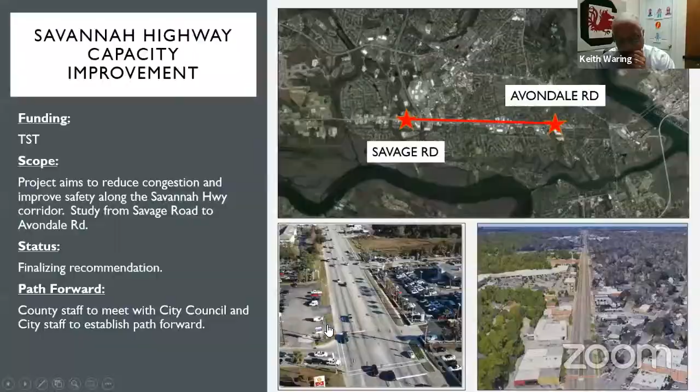Are we doing anything by design to make it easier for people on the West Ashley Bikeway to cross 17 to get to the Greenway? We have the crosswalks there, newly delineated with brick stamp crosswalks, and then just the 8-foot path is what we're proposing through there to connect the two. Okay, so they'll have a button they can push to control them? Absolutely, just as you do at pedestrian signals, those will be at each of these corners.

And I'm going to tell you all this. What I've shown you in those three are just conceptual plans. So there's going to be some opportunities for us to tweak these, and as we move forward we'll be working with city staff to help tweak these to what they need to be in the end. So all those comments, questions, those are great, and we'll make sure we address those as we move forward.

Well, thank you. Thank you for all y'all doing. This is great movement. Richard, that was a very thorough and comprehensive report. And for those listening in, you can see the amount of work we've been dedicating to the cooperation between the city and the county on all these projects.

Thank you, Richard. To follow up on Councilmember Waring's question, we did have some discussions about the other side, on the St. Andrews Boulevard side, of connecting the bikeway as you cross over. I think we've been paying attention to focusing on Sycamore Street and improving that particular intersection as well. Your question reminded me about that — we've been working on that project as well. So thanks for bringing that back up.

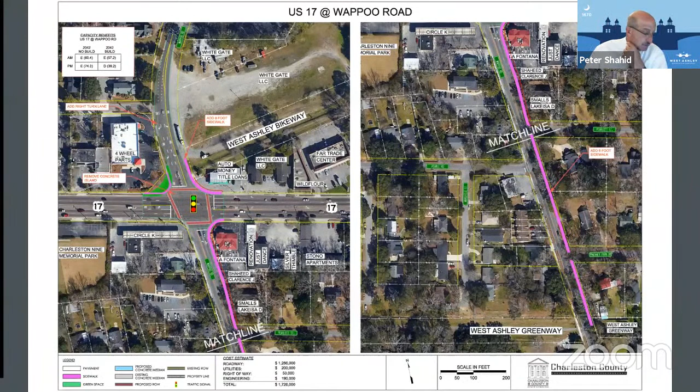Any other questions from the commissioners for Mr. Turner? Because we can move on to the Sumter Street redevelopment project next. Yes, Hamilton? What is the tentative timeline for these various projects, or have none been established?

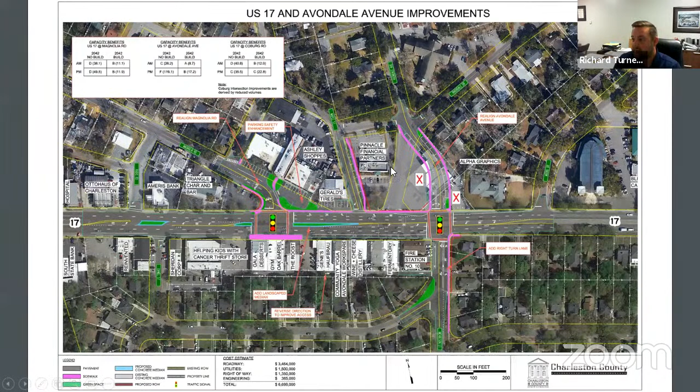For any particular one, these three, I'd say we're probably about 2 years away from breaking ground, maybe longer on the Avondale project, because of the significant right-of-way impacts and changes that would happen there at the old Krispy Kreme and the bank and things of that nature. That one will take a little bit longer to develop than this one.

Hopefully as we move forward we can have some good conversation with Mr. Palas on this property to move this one forward. Other than his property, we really don't have any right-of-way impacts, so this one could potentially move forward pretty quickly.

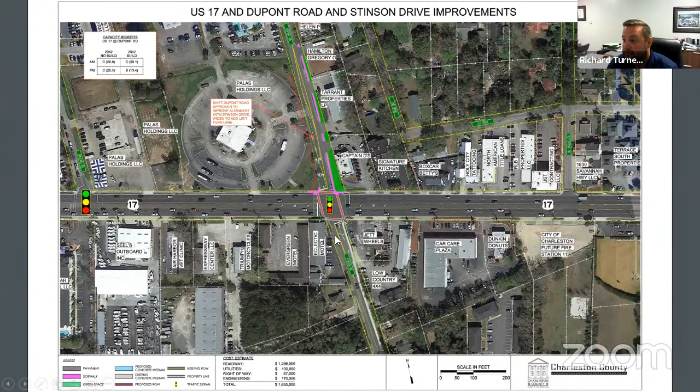Same thing here — we do have a bit of right-of-way, as shown by the red line, new right-of-way acquisition there at the La Fontana and the residence along Wappoo Road. So I'll have to have some conversations there to see how that moves forward.

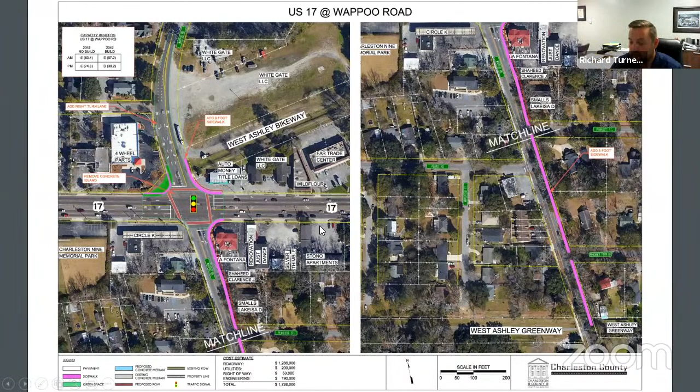The others — the Glenn McConnell project — is in our procurement office for advertisement as soon as possible. We've asked them to make that the number one priority, so we hope to have that advertised for construction bids by the end of this month.

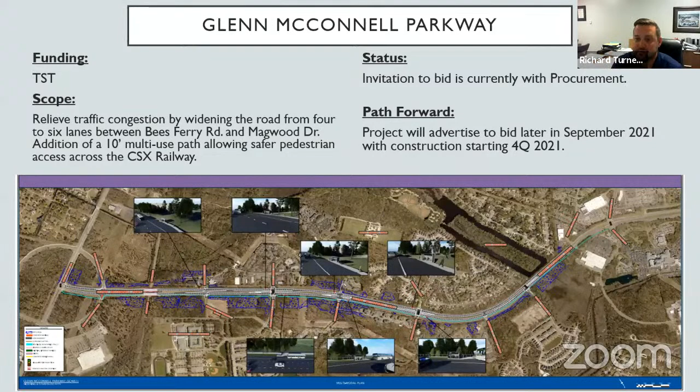The Old Town District, we are probably a year to 18 months away from bidding this project. And then the main road corridor — this one really depends on what delivery method we end up with, whether it's design-bid-build or design-build. If it's design-build, we could be advertising this in '22, my hope, but then it would probably take another year before we'd actually break ground. So we're probably 2 years from breaking ground on this one on the short end.

Okay, thank you very much. You're welcome, Ms. Hamilton. Any other questions from any commissioner members?

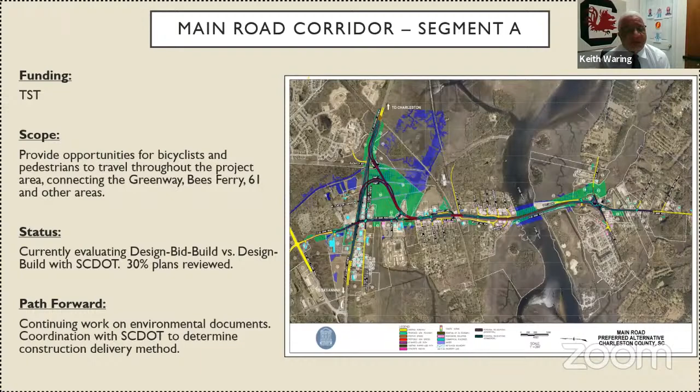Yeah, I hate to say it, but Mr. Turner made mention — and it was a veiled mention — but I think about the county having money to do a certain amount. I think maybe we were talking about Sumter Street. You said it was going to take about 10 million, and you had about 5 million in hand, with the city participating in that. Can we get a better explanation on that? Because it is, hopefully, the strength of this revitalization committee that takes that message forward. We're in the budget process now, as our chairman knows, and if the city can participate to help this come along a little bit sooner, we need to do so.

So if we get back to the money on this side, Mr. Turner, I thought this was the project you made mention about having some in hand and needing some help. That's correct. This year, county council voted to put $5 million into this project, and it's a $10 million price tag, so we're halfway there on completely funding all the improvements.

We have looked at the opportunity to phase it. The first phase would be the intersection here, redoing the intersection, and getting us to about this point. Then the second phase, depending upon which one moves forward first, would be the remaining impact, including Sumter Street, the Amberley Signal, and the realignment there of Donahue and Charlestown Drive.

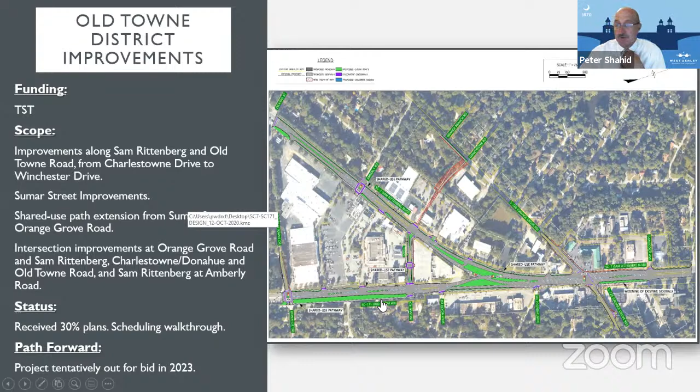And because it's going to have an impact on our redevelopment plans for Sumter Street, but also, as Mr. Turner pointed out, it's going to have an impact for access to that new county park that's being planned as well. So there's a lot of benefits moving forward with this project and funding as fully as possible.

One thing to share though is we're going to continue moving forward as if it was one large project. So we're going to continue developing the plans to 100% for the project as a whole. Where we'll need the money is on the construction side, the acquisition, the little bit of right of way that'll be necessary, and the design that's fully funded for the entire project, and we can move that forward.

So that's not going to slow down. It'll just be, we need to identify the other half of the funding to do the entire project as one construction project. All right, thank you so much.

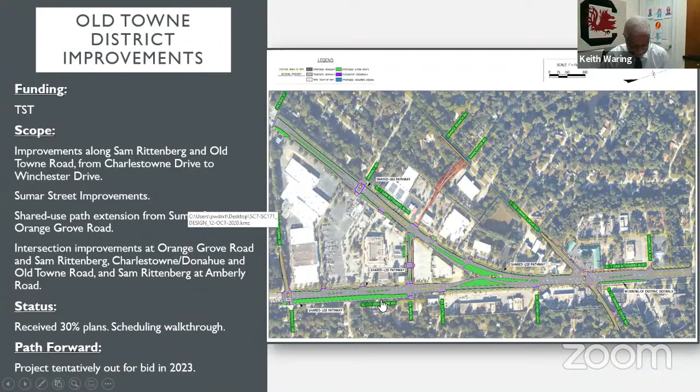All right, that being said, Eric, can we move on to item 3B?

Yes sir, I think I do see Julia Copeland available somewhere. I think she's either on her phone or, she was able to join us. And the mayor has signed on as well. So I know, yes he was sir, tied up in another meeting with that. So you want to start the ball rolling on this one, Mr. Eric? Yes I will, thank you. One moment, let me do a screen share again. All right, go.

So it goes all the way back to 2017 when the city purchased out the parcel. After that, we adopted Plan West Ashley. Then in 2018, we moved through a demolition. We had to get a contract bid out, had to do all that good stuff. Starting February 20th of 2018, we actually placed a notice for demolition services.

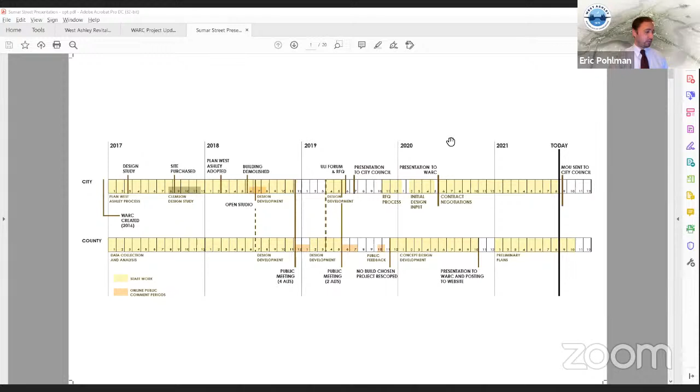We then had a presentation to council to show what we had been working on up to that point, before we did a release for request for qualifications. After that, we had Landmark Enterprises, who'll be able to talk a little later in this presentation. They came on board, and we worked through with them some background on what we wanted to see happen at this location.

And then we entered into contract negotiation after June of last year. So to go back in time now on the presentation, we had a very robust public input process for about a solid 30 days in 2018. It's a good month there. We had a survey up online.

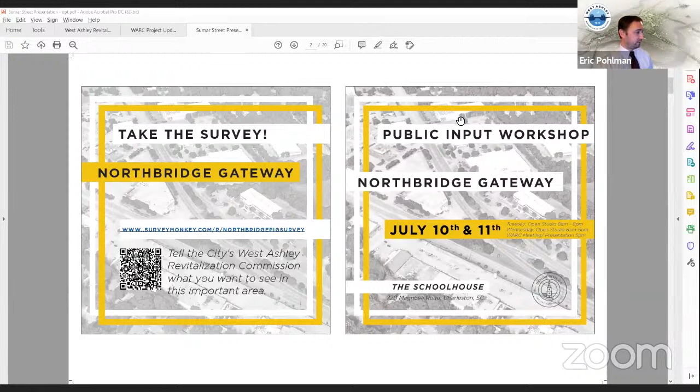In addition to the survey, we had a 2-day workshop where we encouraged residents to come in and tell us their idea for the site. With Alan Davis of our Civic Design Center and his other urban designer, Morgan Gunlock, we sat down and drew up exactly what the residents were talking about on the site to show them how it could work, if it could work, and if there was room for more to go on there. Most of the time, what we discovered was this site was quite larger than what a lot of residents would want to see happen there.

So they would come in and say, we want to have a restaurant or two. Well, we would put the restaurant in the parking lot, and they would see that it could hold quite a bit more. Having a large scale grocer really kind of distorts how large this parcel is and how much activity can occur on it.

The survey results that we had came in to just around 930 respondents over 30 days. 733 were just from West Ashley, with residents of the neighborhoods living close to this - Northbridge, Sandhurst, Parkshore - making up the largest single majority of neighborhoods that responded.

What people wanted to see was the area have safe crossings for bicycles and pedestrians. They wanted to see improved landscape. They wanted the intersections to also allow vehicles to travel through as quickly as possible. They also wanted to see passive park, small scale retail, and restaurant.

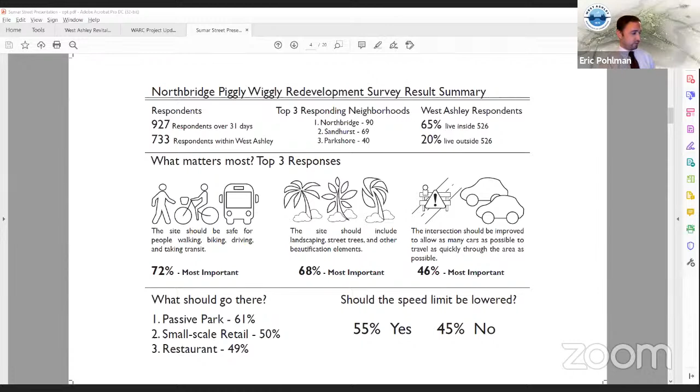We had 708 responses to 'What was your big idea?' This was kind of just a fill-in-the-blank question portion of the survey. And really 7 themes came through: green space, retail, traffic transportation, making sure that we make this a mixed use or traditional neighborhood style development.

Having a civic or cultural anchor at this location. There were a few people who wanted to see it turn over for residential. And then we had some just miscellaneous ones, such as make sure it looks beautiful, make sure it's useful, things of that nature.

So when we put together our first program, we made sure that we distilled it into those categories. So we made sure that it had passive park, small scale retail, restaurants, as well as a civic or cultural use to it. And what we did was ratio those out in terms of square footages.

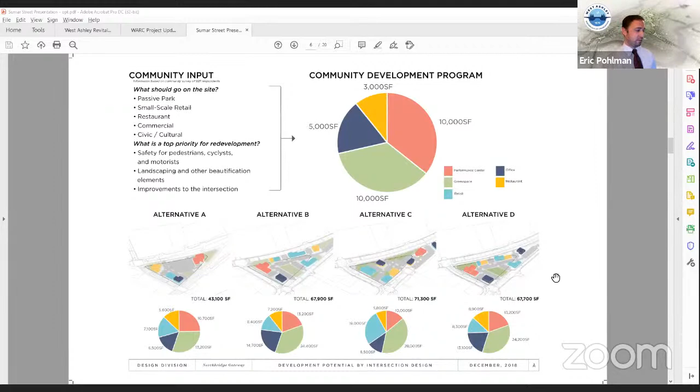And at the time, we had 4 design options for the Sam Rittenberg, Old Towne realignment, and we produced diagrams showing how we could still meet the intent and desires of the population for the intensity of use at this spot.

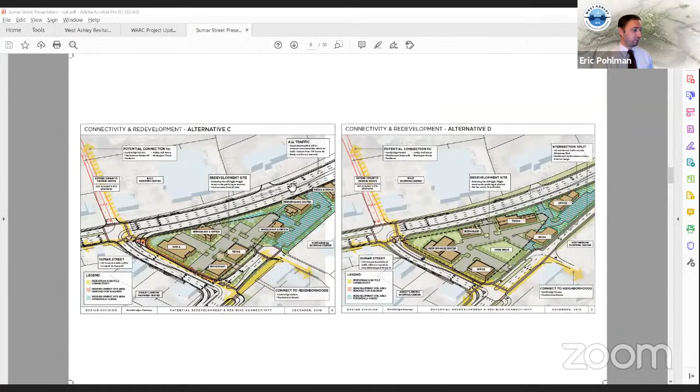So we showed them what it would look like if nothing happened, if the road got widened in that direction, if Sam Rittenberg really took over and everything had to go down Sumter Street, or if they're allowed to have a slip lane, but most traffic still had to go down Sumter Street.

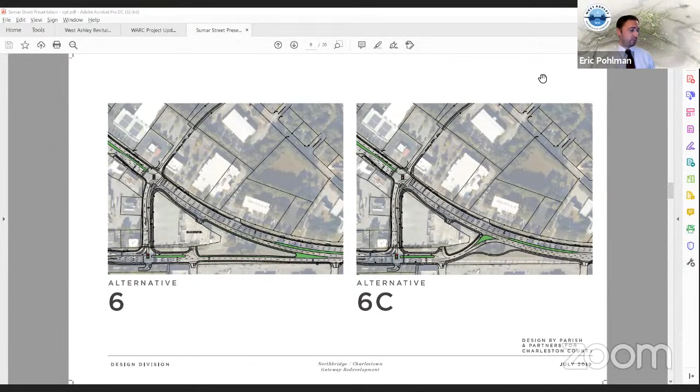So we worked through those, and then through the county side, they went through their process and whittled down their 4 options to 2 options. These were the 2 options that came back to us that really showed a much more elongated parcel for the majority of it. So we went back to the drawing board, this time with ULI as a partner, to show how we could get the program onto these. In addition, ULI looked at what the market would want to support at this spot.

So we did up design iterations that showed us having a large footprint office along with a parking deck, having just surface parking, having a mixture of both, and even one where we suggested having a mixed use residential and office building. When we presented this to the West Ashley Commission, the public was very adamant about what they saw for this location.

It did not include a parking deck. They wanted to see something that was in keeping with the West Ashley area, and they wanted to see something that would be more akin to the Avondale development, having surface parking with a lot of mixture of use that was accessible through walking and biking.

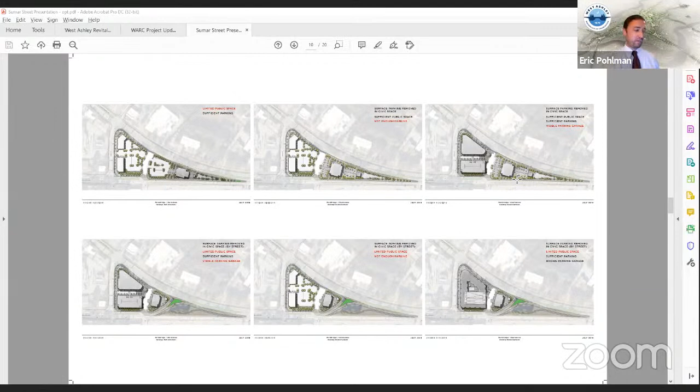For the council members, this one may look a bit more familiar to you than the others. This is what we presented, or Alan Davis presented, just before we sent out the request for proposal or request for qualification. On it, we showed the parcel as intended. By this point, we already had an inkling from Richard that the parcel itself was going to remain very much in its current alignment as they looked at ways to adapt their project to what you just heard about.

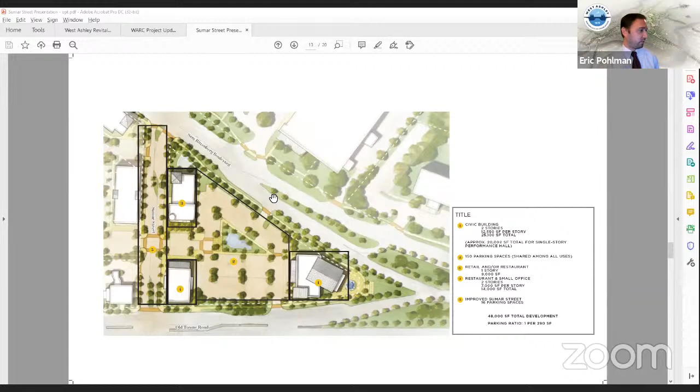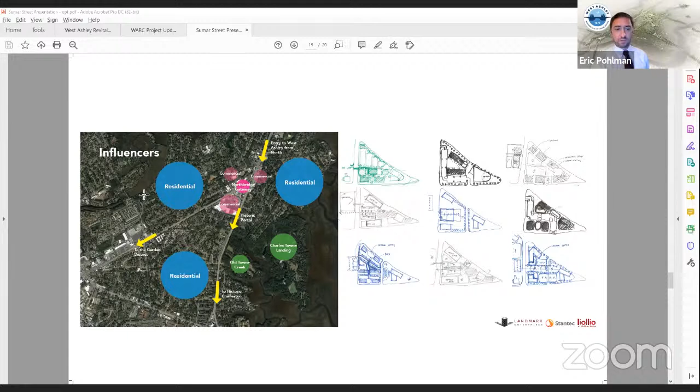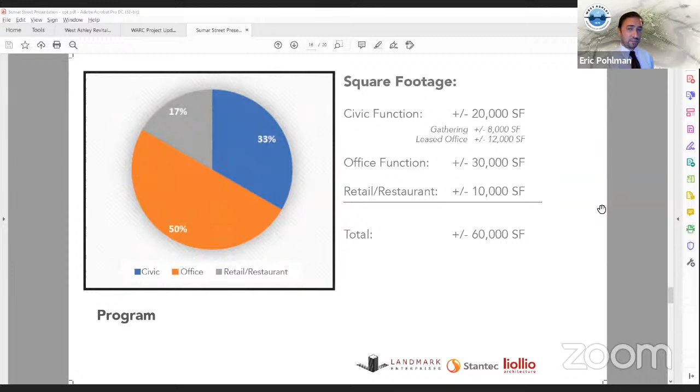We had some suggested square footages and some suggested parking for this location for how to achieve it. When we sent it out, who we got back was Landmark Enterprises and their team with Stantec and liollio. They did their own cursory research to improve upon what we had sent out with the packet, which included the survey results you just saw and the different iterations we had done. Once they ran it through their market expertise, this is the ratios and square footages they came back with in terms of how to achieve the mixture of uses, both civic and private commercial development.

They presented to us, I think, three or maybe four options. One showed the layout very similar to what we had sent out with our RFQ, showing the civic structure at the tip of the building or the parcel, and then having the private investment more fronting along Sumter Street to create street activation along there.

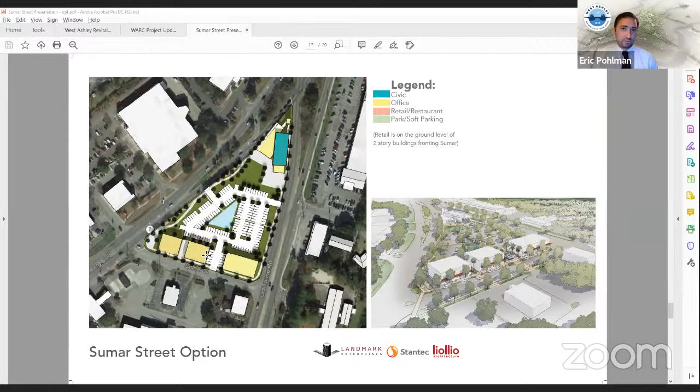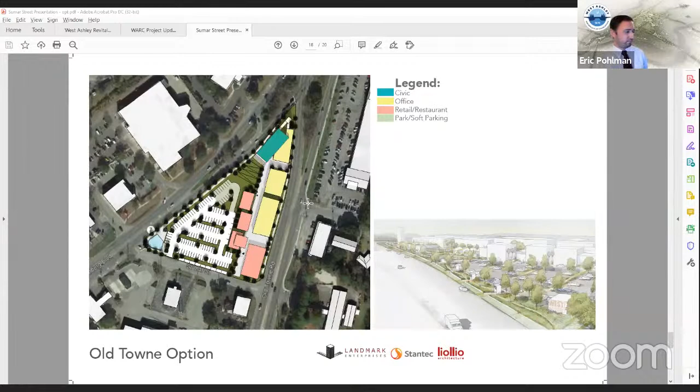They also did two other proposals, one showing a kind of activated pedestrian alley system, clustering the parking on one end. This one showed the alley system going towards the Civic building on the Old Towne side, and the other would be on the Sam Rittenberg side.

Through debate and discussion at the West Ashley Commission, this is the one that you all agreed was the best plan for the area, saying that Old Towne Road has more of a softer feel to it, having the wider pathways and parks on it, whereas the Sam Rittenberg side you felt should have much more activity and commercial intensity along it.

So I've caught you up to where we are in terms of the different designs. What we've been working on with the Landmark team since then is getting them into a design contract where we can take it from these color blocks showcasing square footages into a much more detailed conceptual plan. This coming Monday is the memorandum of understanding, which will create a contract of that nature.

At this time, I'll come back to this slide after Landmark has had a chance to come in and talk with you guys a bit. But the general idea is that this is not the last step of the public input process - we actually have quite a robust review system in here before we break ground.

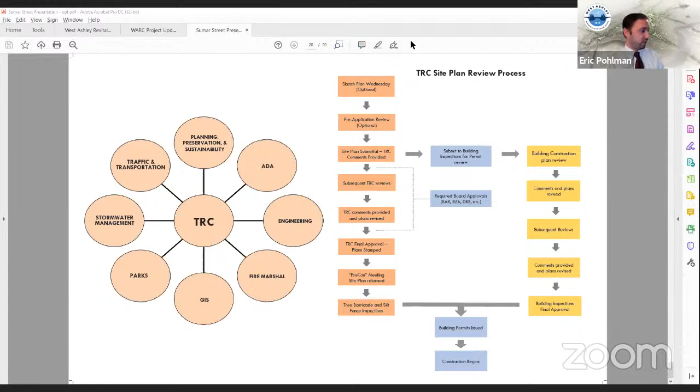But I will let Jason Ward with Landmark take over at this point. Hey, Jason. Hey, Peter. Hello, everybody. Thanks for having us. Hello, Mayor. Council members, thank you for having us.

This has obviously been a long time in the making, but from Landmark's position, we are extremely excited to be at this point and really get the process started from here. We're excited about the plan, excited about the uses, excited about what this does for this area of West Ashley and this community. We are definitely ready to get going. We appreciate everything and are happy to answer any questions.

For those of you who don't know, happy to answer any questions about Landmark and what we do and who we are. We like to say we're a full service commercial real estate development company that offers brokerage, management and development services to the community. We've been developing in the city of Charleston since 1974, and we've been here for a good bit. This is our backyard, something we care about a lot. We take a lot of pride in bringing these projects to our community that we live and do business in, and we're excited to be selected and ready to get started.

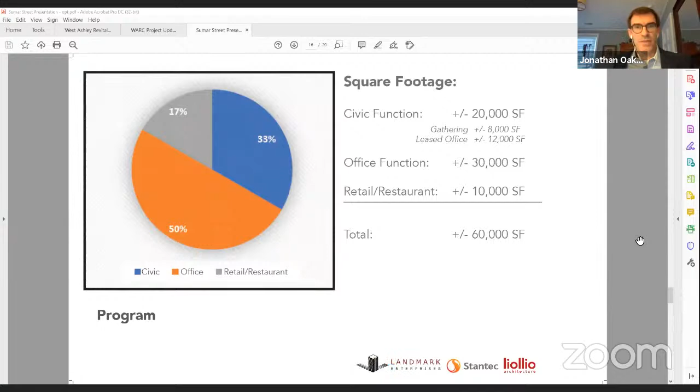It's a grouping of smallish buildings that include a hearty mix of uses, that being civic space at the top of the area, some office space designated for uses that the city wants to put there, as well as some private sort of neighborhood small office space. And then we would also have opportunity for several local restaurants and bars that people could take advantage of in the community, as well as neighborhood retail, more or less in the proportion you can see on the screen here.

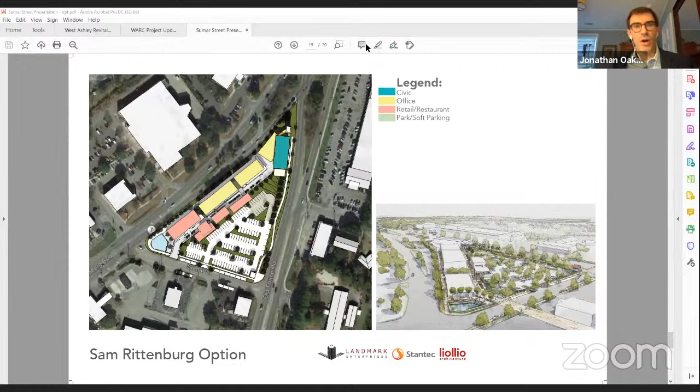That's the current plan. In addition, there's a green space, a lawn area, as well as some of the parking area that would do double duty as outdoor event space. So we could have community focused events here, such as a farmers market or a bocce tournament, a car show, things that will activate the area and get people out here to meet and commune.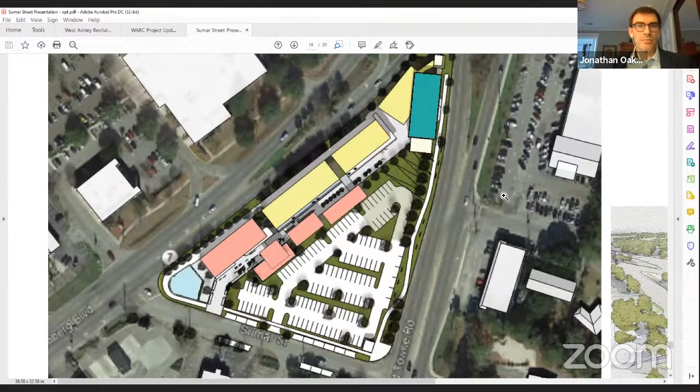I think what we're building here, Councilman, is really a community focused center where all these mixed uses come together in a way that the community can all use them—outside events, interior events, places where people can come and eat and grab something to drink and meet, as well as some uses during the day to activate the space, that being either small retail or some neighborhood office, smaller office uses. That's how I would describe the project.

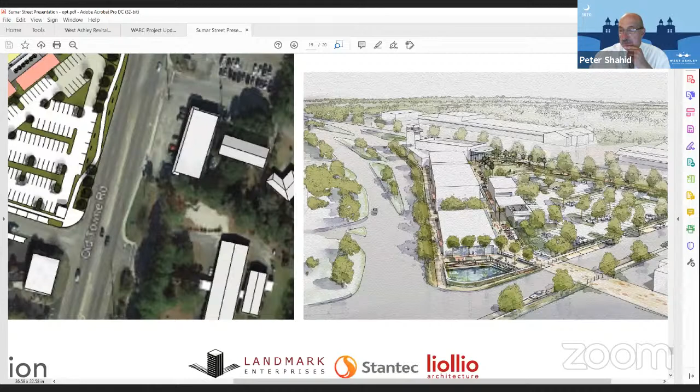Okay, thank you. All right. Any further questions, comments from any of the commission members or any of my colleagues on city council? All right, well, very good. Mayor, anything else that you want to add or comment?

Thank you, Mr. Chairman, and thank you, Jason and Jonathan, for hanging in there with us to get to this MOU that will go to council next week. I think it's really a fair way to step this project forward, to get us to the next design phase where we would all be comfortable with what we're going to build there and what the pricing will be. Importantly, it's going to be a key issue for both the developer and the city and our partnership going forward.

And I know Liollio, who for example designed Fire Station 11, is going to do a fabulous creative job designing something that we can all be proud of. I don't know if they're on the line or not, but they've done some wonderful work for the city, and we look to them to really be on their best game on this project to create something that West Ashley would be proud of.

So admittedly, this has all taken longer than any of us really wanted, but it's really coming together, and I want to thank everybody who's been working on it.